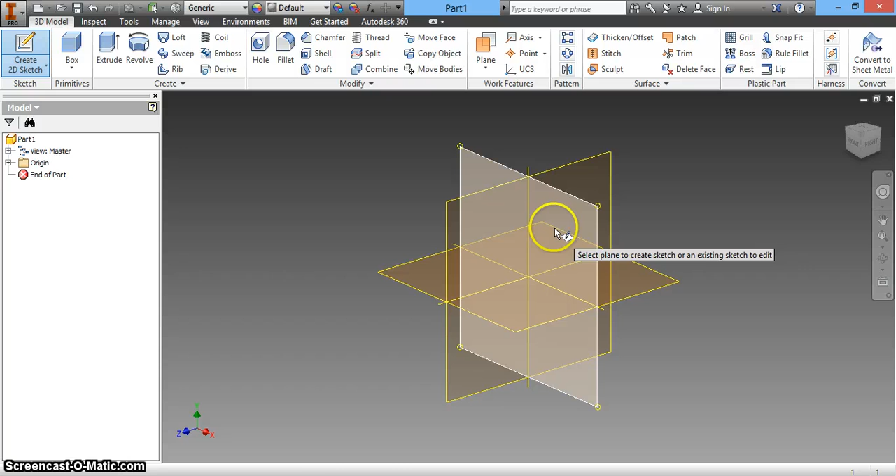To start every new part, create a 2D sketch, which is up here in the top left corner. Click on that. For 2014 users, you'll see this screen, but if you're using 2012, which is on the desktops in the CAD room, you won't see this and it should come up with a grid line. Just click that, and now you're in sketch mode, shown in this little green menu.

All we want to do here is create the diameter for the shaft. So up in the sketch menu, select Circle. Bring the cursor back down to the middle, which is the origin. You'll see it go green, then click once and drag out, drag it anywhere, then click down.

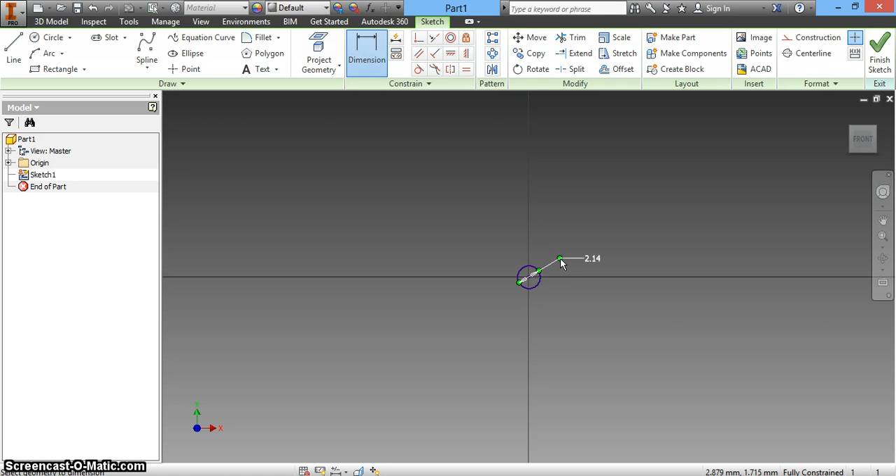Our brass filler rod shaft is 1.6, so we want to make sure we dimension it so it's 1.6 millimeters. Select the dimension tool up here, hover over the circle, click once, drag out, then click again to locate it. Now click on the dimension and make it 1.6 millimeters. Okay, finish the sketch and we'll show you what to do next.

Now we've finished our sketch, we're going to move in to make it 3D. To do that, we want to use the menu at the top called Extrude. This is where we click and it'll turn our 2D shape into a 3D shape.

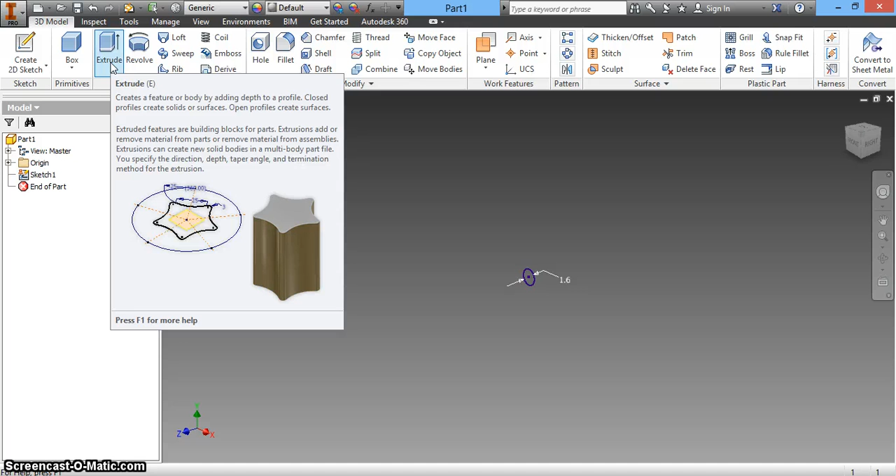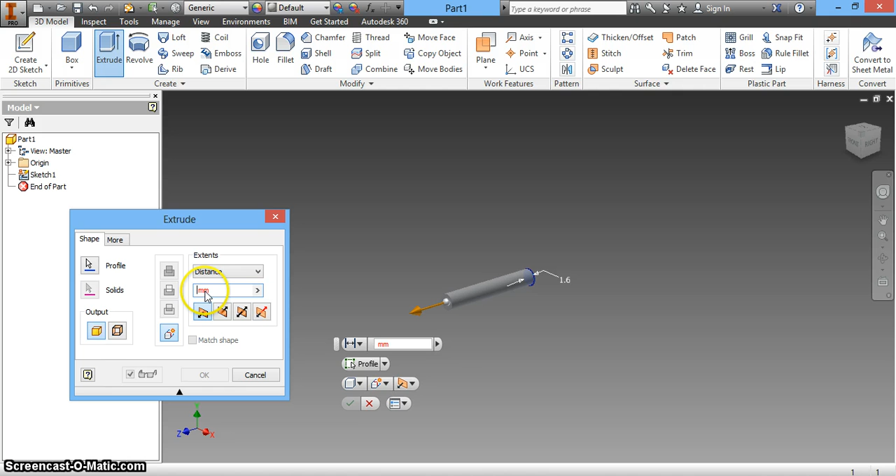Just click Extrude. Now it's going to automatically select that circle because it's the only shape it can recognise. Over here in this menu, this is how we determine the length of how far we want it to extrude out. In this case we need to make it 200 millimeters, the same length as our pipe eventually. So click in here and make it 200, and you'll see the preview.

Just hit OK, and to get our view back center, use this little cube at the top and always click on the corner and it'll center it back in. There we have it, that is our little shaft. We'll just do a few little cosmetic things next.

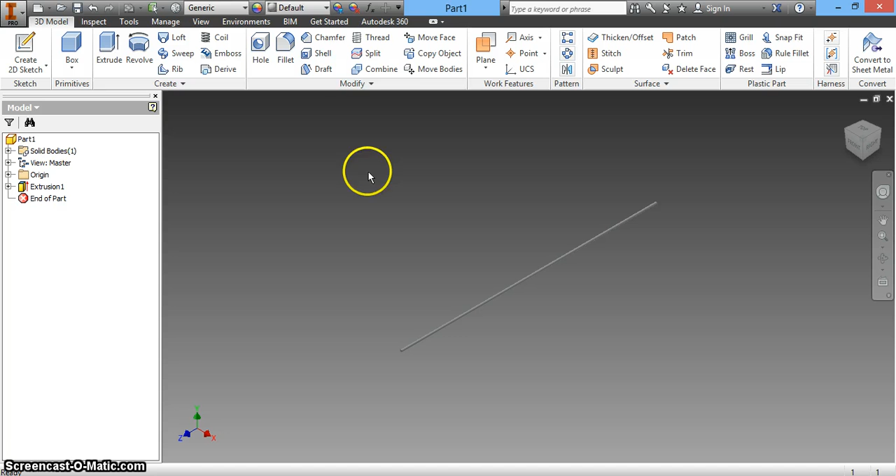Now we're going to make it look like brass, so just go up to the top menu where it says Default, and this is our appearance tab. Scroll through different materials we can pick. It was made out of brass, so hopefully there's some brass in here somewhere, and there it is, Brass Satin. That'll do. You should see it change colour. Now we can zoom in and see it's nice and shiny for us.

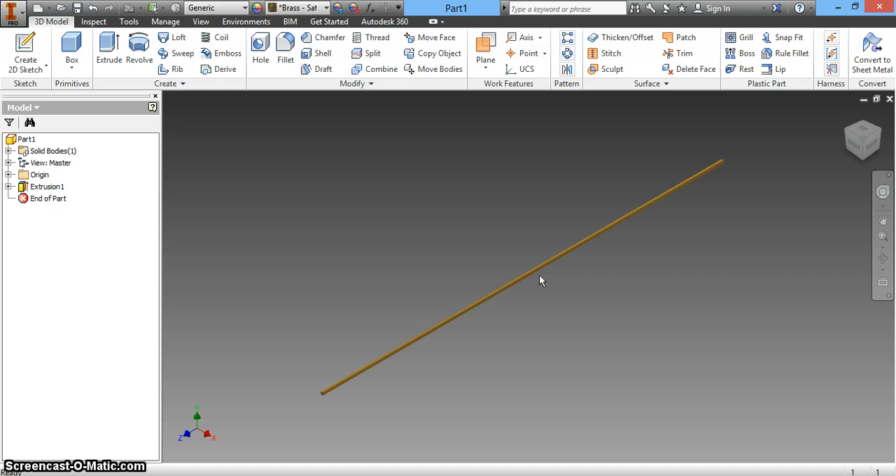So that, ladies and gentlemen, is how you draw the brass filler rod shaft for your pump assembly. Good luck.